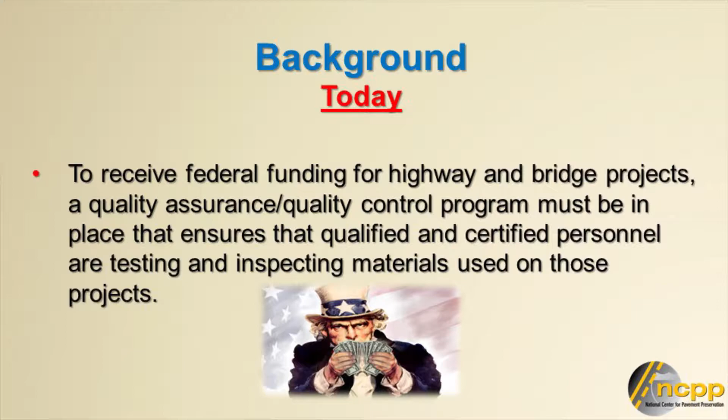And this little caveat comes into place, and it's even more important today, because if you're going to receive federal funding on highway and bridge projects, a quality assurance, quality control program must be in place that ensures that qualified and certified personnel are doing the testing and inspecting of materials on those projects. Now that's a little different, but a lot of our agencies don't really require good quality control from our contractors. Some have it, some don't.

So what's the goal of this? We think it's important that you need to certify personnel that have demonstrated this ability to give you a good job, a quality job. And this is a simple goal. We talk an awful lot about good designs because you heard it this morning. We talk about using the right materials. You know something? It has no value unless we have good workmanship.

That's been one of the biggest problems. You get this when you see a bad job. Everybody is pointing at everybody else, but quite often it's not the materials, and it may not be the design, but it could be other things. It could be selection, it could be those sorts of things, but more than likely it's workmanship.

Here's some examples. Has anybody in here ever seen a failed job? Raise your hand. All right, so I don't think I'm talking to inexperienced people; they know what a bad job looks like. And unfortunately, we have far too many. This is a chip seal. Jason went through what you should do, but obviously the person that put this down didn't understand what you should do. Here's a micro. When you see ripples or non-uniform texture and those sorts of problems, that's a workmanship issue. That's not a design, that's not a material issue.

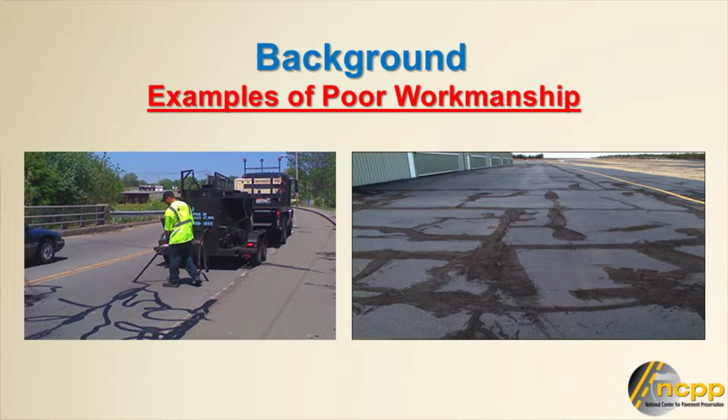And then we get into crack treatments. Now, this may be partly selection, but when you paint the road with a sealant, that's pretty poor practice. We've got to stop these sorts of things going on, particularly nowadays when money is short and an agency owner can ill afford to have a bad project because it just turns everything upside down. Your budget is shot. Not to mention, let's talk about reliability and performance.

Because there's been an awful lot said about how we're going to shoot at targets, meeting our performance targets. And since that money's short, what happens if a job goes bad that you had counted on, a big job, and all of a sudden it puts that big dent in your moving towards those targets in your pavement system, your pavement condition?

So it's extremely important, and that was one of the things that Chris Lubers brought up, that the ETF is working on a number of initiatives because we want to make sure that agencies have the best design specifications, the best material specifications. We're working on the construction guidance documents, and that's a little long story, but that's going to get rolling. But we need to make sure that it's put together properly by the contractors.

So moving ahead, what's the value of having certified people? Well, it reflects an achievement. And I know that most of you have an automobile. Would you take it into a garage where the mechanics are not certified in some way, shape, or form? Would you take your taxes into an accountant that wasn't a certified accountant? It goes on and on and on. There's a lot of certifications out there, and we already have them in this industry.

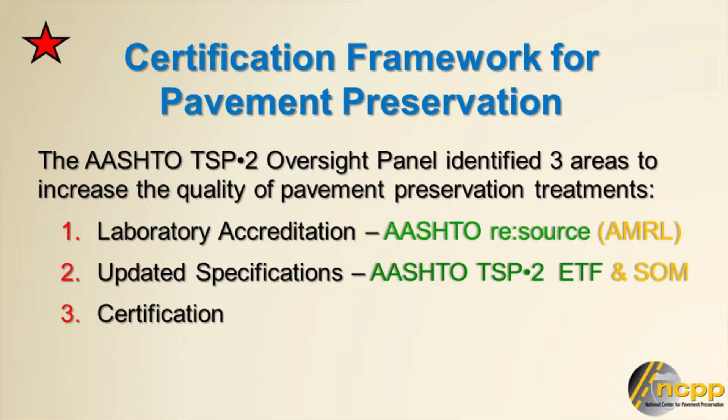And then the updated specifications. The group in there, Gary and Jim, along with the committee, developed microsurfacing and chip seal specifications that are in the AASHTO spec book. And so now agencies can just refer to that provisional spec or that specification through AASHTO. So it's already established. And that's done through the ETF and a subcommittee on materials, as Chris Luber said.

And then we're finally getting into this certification issue. So let's talk about this. It was approved by the AASHTO TSP2 oversight panel that we need a certification program for pavement preservation, and it was done April 13th of last year. And because we carry out the AASHTO program, we will administer this on behalf of AASHTO through the center.

The key to certification is twofold. You've got to have the agencies certified, but you need the contractor certified. And just to certify one and not the other doesn't make that chain strong. You need the agency out there that understands what's going on the job. You see, think about this.

There are some very good contractors out there, and the good contractors come at a little price. We're in a low bid system, so sometimes, and you know this better than I do, maybe a contractor gets a low bid that you hope did not. That contractor has to cut costs to make some money. He has to cut corners, I should say. You're left with the results. You got something that's a mess out there, you got a public relations problem.

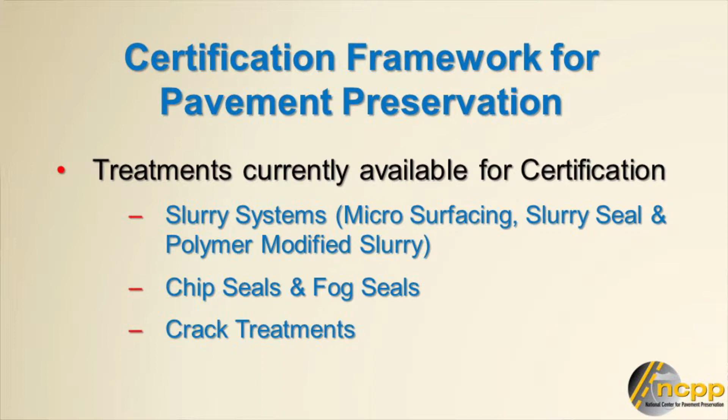The treatments that are currently available for certification, and we're doing them by the treatment, are the slurry systems, which include the micro, the slurry system, polymer modified slurries, chip seals, fog seals, and then the crack treatments. Guess which one has the toughest? Which one do people have the most problem with? Anybody want to take a guess? Crack treatments. That's where the swagger comes in. There's nothing to a crack treatment. We can just come in and pass that exam and we can get it. So it's counterintuitive. That's some stuff that we have to think about.

Talk about training. I'm hoping Chico State does training. I'm hoping Long Beach State does training. I'm hoping University of Washington does training. I'm hoping University of Nevada, Reno does training. Because training is something you can't get enough of. But there's also free sources out there for training. It's web-based training, and it's through ISSA. It gets into the details on all of those treatments, and it gets into very good detail that you have hurdle tests and then you have a final exam.

Believe it or not, we can actually monitor how that online training works, because we can tell who signed up for it, how long did they spend in the training, did they do well on the exams or the hurdle tests. We found a lot of people come in and said, oh yeah, we went through that web-based training, it was really great. Come to find out, a 90-minute session they spent 5 minutes on. So they never really trained themselves. But these are things that I can tell you and share with you, that if you're really serious about raising the bar, in which we all want to raise the bar, this is some very good training.

First, let's start with the contractor, the company itself, because they're the ones ultimately going to be held accountable. The company is really responsible for everything if you think about it. They're responsible for a trained workforce. We're only saying that certain employees need to have certification, but the company should certify the rest. And they have to have a detailed quality control plan. Annual renewal required.

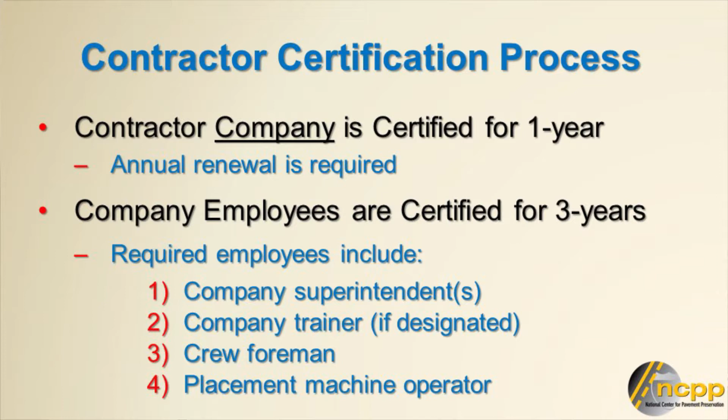For the employees within the company, we're recommending a company superintendent and a company trainer. If it's a bigger company, they have to do in-house training, so we're recommending somebody within the company that's certified that does the training; the crew foreman on the job, and then the equipment operator that's running the laydown or placement equipment. There can be more than that, but those are the minimum recommendations. Certifications for the employees are 3 years, but with the experience to roll forward, and this is something that the industry recommended in this certification process.

Company certification should only be awarded to a superintendent if he's got 3 or more years experience, trainer 3 years of experience, crew foreman 2 years, and the equipment operator 2 years. In other words, we don't want somebody that worked at McDonald's last week come out and assume that they're an expert on equipment operations.

Then, in order for the company to renew their certification, not license, we want to make sure they do in-house training, and we're not asking for a lot. It's only 4 hours of classroom and 4 hours on the job. That way, the person running the lute or the mop or the squeegee or whatever, at least they've had some in-house training and they know what they're doing. It's not a big burden for the contractor. I would hope the contractors do that now, and I think your good ones do that. A lot of on-the-job training is important.

Contractor has to submit his quality control plan. That quality control plan is essentially a one-time effort, because if they put the effort into making a really, really good quality control plan, then they should only have to change the names of the people that are in the crew, potentially where they do the testing, but everything else is pretty much the same, so they can use it. Now, states may have different additional requirements. It's something that they need to know.

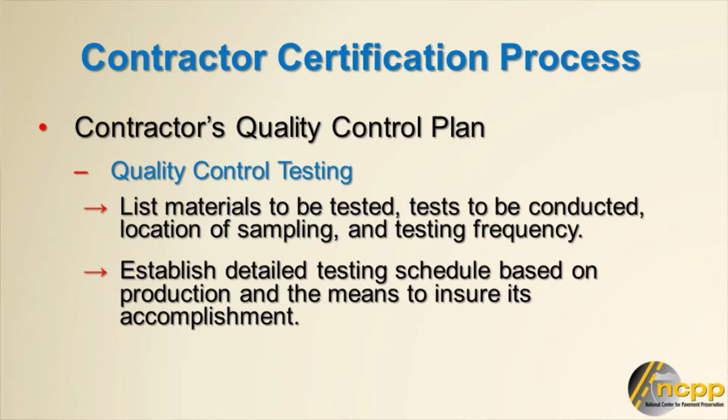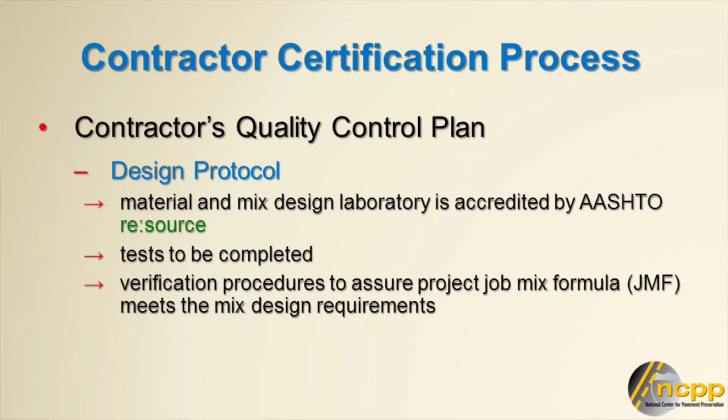Quality control testing, I'm going to buzz through this, quality control plan, and the design protocols, and we're hoping that eventually when AASHTO Resource, formerly AMRL, they go through and accredit labs, they go from east to west, and it usually takes several years to make that run from the East Coast to the West Coast, certifying labs as they go. So it's going to take a while to get the laboratories involved. There are already some laboratories that are accredited in the Rocky Mountain West, and hopefully there'll be more accredited for doing the microsurfacing tests, the chip tests, and so forth. So not every accredited lab can do these tests, so you need to kind of check that out.

Quality control plan, I'm going to buzz through this. There's different parts on a quality control plan. There should be a preparation phase. Contractor should go out and look at the job before it bids it, because have any of you had a contractor come back and say, you picked the wrong project, I did the work, but the reason it's going bad is you picked the wrong project. He knew that ahead of time. Why didn't he say that ahead of time and document it with the agency?

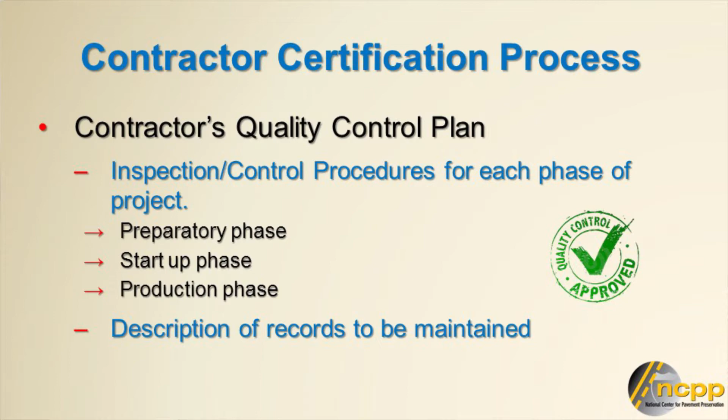Startup phase, what about calibration? Are they doing the calibration? The production phase, how often are they going to take those samples and so forth? It gets into a lot of detail. Where are the records going to be maintained? Goes into all of this. And then for the employees, it's pretty typical that the examination is 80 questions. Maybe a little less on crack treatments, but on slurry systems and chip seals, for the contractor, it's 80 questions.

Indiana DOT did them in-house. They decided they did not want to do the agency exam, so they brought in all of their people, their foremen, their operators, their superintendents from all of the districts. They sat down in one room together, they went through that online training, and they took the contractor examination. 36 people sat in the room and they went through it all together. Out of the 36 people, 34 passed the contractor examination.

If you pay attention, it's not a big deal. But if you walk in with your swagger, you're probably going to be stunned with the results. Where the examinations are offered: first of all, they're offered at any one of the partnership meetings. We will offer any one of these certification examinations. We're going to give one today.

The ISSA puts together a workshop down in Las Vegas. I guess I better say Clark County. There's usually well over 100 people that take the examination there, and that's a big deal. So that's a lot of contractors, but there's agencies. If you really want to know about these treatments, that's a great place to get training. If we have enough people, we'll come out and administer the exam through the center. And then let's just say that 1 or 2 or 3 or 7 or whatever want to take an exam.

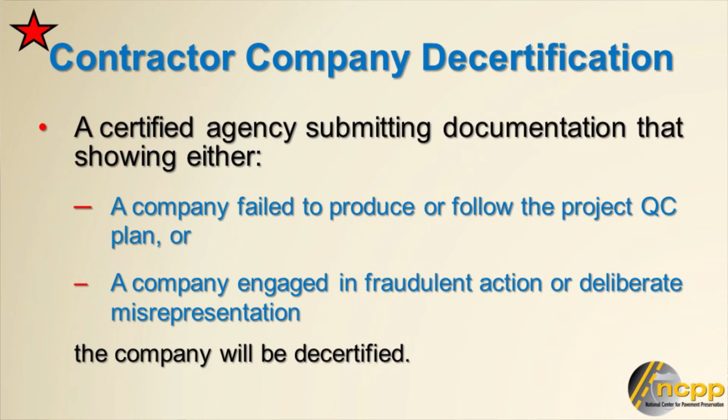If the company fails to follow their own detailed quality control plan, which means they're taking shortcuts, and of course the agency has to be certified in order to call them on this, that's grounds for decertification. Also, if the company is engaged in any kind of fraudulent action or a deliberate misrepresentation, that's also a cause for decertification. We don't think that we're going to see an awful lot of that, at least we hope not, from certified companies.

Hi. So, looking at this from the concrete side, you have treatments that one contractor, let's say a Penhall company, might come in and do full depth repair, partial depth repair, dowel retrofit, grind it, and then seal it. In terms of the certification, at the end of the day, that contractor would need to be certified for each of those treatments in order to be able to go out and say, I'm a certified contractor capable of doing the concrete pavement rehabilitation or preservation work, correct?

This is why we need industry involvement. I think that sort of question we have to sit down with your association, the concrete industry, and hash this out, because those are important factors. We want certification in the concrete area, but it's not meant to be a hammer. It's meant to ensure that the jobs are done properly. And so, yeah, those are things that we need to sit down and work out together, having the input of AASHTO. I don't have a good answer for you.